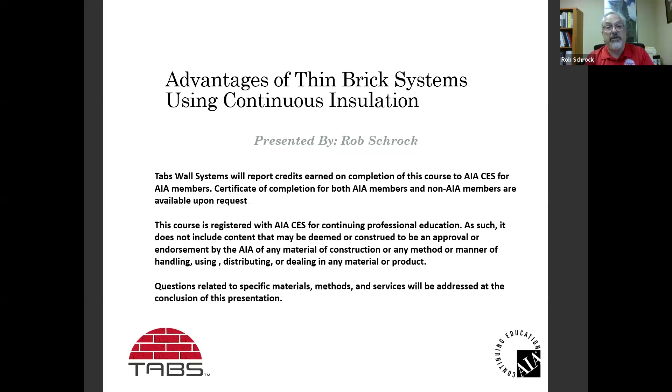Today, we're going to look at the health, safety, and welfare impacts of continuous insulation on applications involving thin veneer masonry materials, an evaluation of concerns for design, installation, testing, and code-related issues.

Learning objectives today are to become familiar with the many possible design applications using thin brick, tile, and stone, understanding the industry trend towards continuous insulation, understanding of the impact of the NFPA 285 flame spread test on adhered veneer applications, and how the Miami-Dade notice of approval can be valuable for your project owner, customer, and occupants regardless of location. We're going to look at the value of specifying properly tested thin brick wall systems, and an evaluation of the concerns in design and detailing for thin veneer application over continuous insulation.

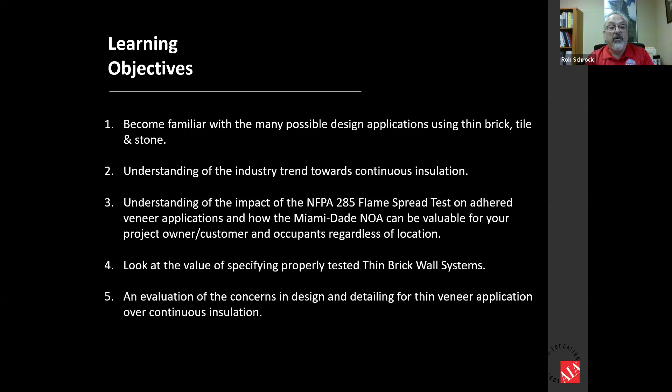So let's get started and look at a few project types that are successfully designed using thin brick. Throughout the years, I've been involved in this system for over 20 years, and hospitality is probably one of the majority users of the system. Every hotel brand has used our system on one of their sub-brands.

Also, multifamily residential has always been a high valued user of our product. And if you look at the last two photos I've just shown, you'll see mid-rise, and as we'll talk about a little later, we can go high-rise types of projects with thin brick.

Again, hospitality has been a large consumer of products like ours. And the medical facilities - we've worked a lot on medical facilities in different areas of the country, whether it be in the Southwest, as in this slide, this is UMC El Paso Hospital.

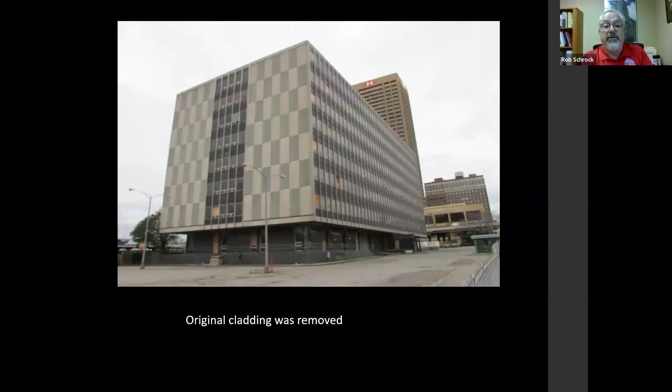So this next series of slides is going to show a project in Buffalo, New York. Thin brick and thin brick systems are an excellent choice for doing renovation work, such as indicated on these slides. This was once a multi-use project in Buffalo, New York. The original cladding that you can see here was all removed.

The original glass and metal cladding were all removed and replaced. The new design idea was to create a masonry facade. The original structure was not engineered to support full bed masonry, so a thin brick wall system was chosen to provide a brick facade that met the original engineered structure.

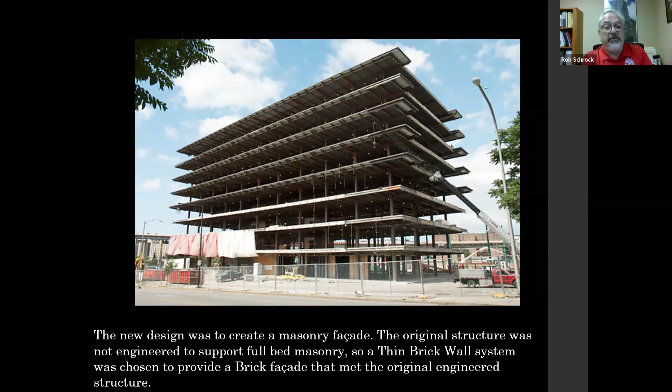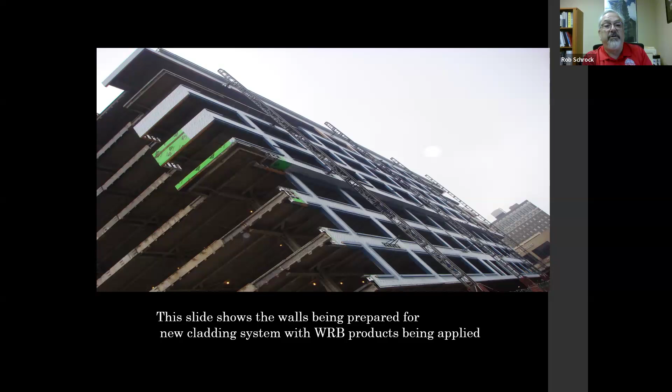Here you can see the walls being prepared for a new cladding system, and the WRB products are now being installed in preparation for the cladding to go over top of them. New sheathing and rigid insulation was added. And now the structure is mixed use office and hotel property.

So now let's look at some key factors to consider for your next project. Here are some thin brick advantages: no foundation brick ledge required - there's a substantial cost savings there. The design load for framing is L over 360 versus L over 600. No hung lintels required. You'll gain more usable floor space on the same building footprint.

And there are year-round installation cost savings available, especially up in the northern part of the country where you have a lot of tenting and things like that - the heating of the mortar and keeping the brick warm for installing masonry projects in the winter. You don't have a lot of those costs when you're utilizing a thin brick system.

You have potential lower labor costs, installed by various trades instead of strictly just masonry trades. So there's some potential cost savings there. For contractors, there's more design freedom - cantilevers, etc. - due to the lighter weight of a thin veneer assembly, and it's easily mixed with other lightweight facade materials like EIFS or siding products. And it's easier to change the facade in future renovations. Retail typically changes every 7 to 9 years in the lifespan of a retail facility.

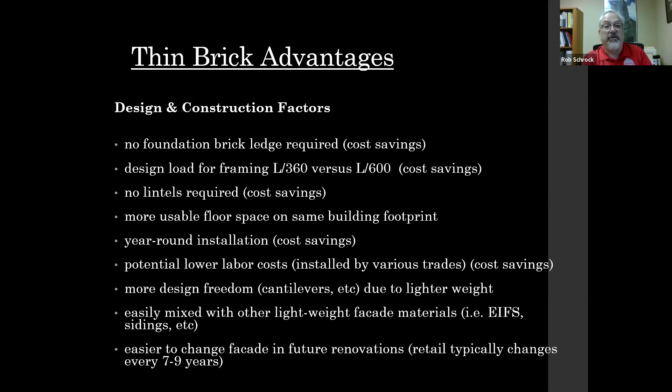So there are several green energy and LEED considerations. A 1:7 ratio of delivered costs for thin brick versus full-size brick, including the units and the mortar. You can ship 9,572 square feet of thin brick compared to 1,637 square feet per truckload of full brick.

165 pounds for thin brick versus 1,350 pounds of mortar per 100 square feet, and 907 million BTUs versus 4,114 million BTUs to produce the thin brick if it's made in a split tile format. And 2,400 to 14,000 embodied energy to produce, mine, manufacture, and deliver thin brick versus full brick. So there's quite a potential for green and LEED opportunities when using thin brick.

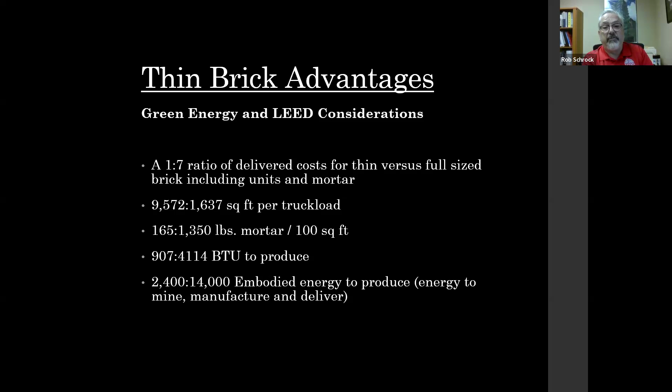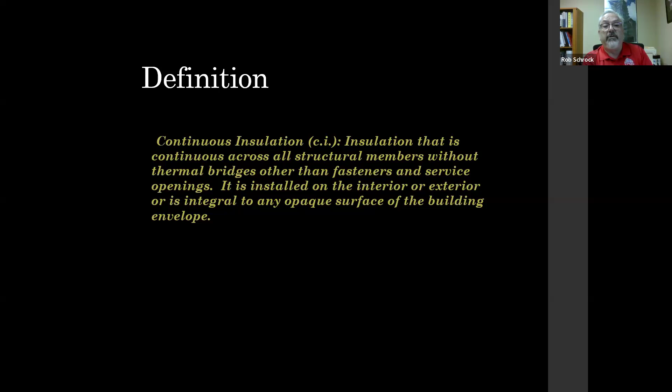So now let's talk about continuous insulation. Continuous insulation is insulation that is continuous across all structural members without thermal bridges other than fasteners and service openings. It is installed on the interior or exterior or is integral to any opaque surface of the building envelope. A continuous layer of thermal insulation mitigates thermal bridges through framing. It's important for steel framing especially.

Cavity insulation is not very effective. A practical, effective way to insulate concrete or masonry walls is considered by building science experts as a best practice, as it is for wood walls, especially in colder climates. And it avoids cold wall surface issues such as condensation, mold, discomfort, and ghosting.

Condensation - everybody thinks that once it's summertime, you don't have any problems with weather, but when the air conditioning is running and you have metal studs, then you get condensation on those metal studs, and that can bleed through. And with continuous insulation, it helps mitigate that.

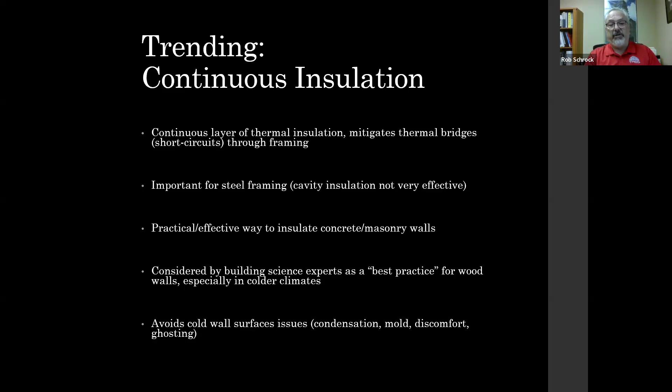So creating a proper building envelope with continuous insulation, you have weather resistive elements, cladding, etc. It's an air control element, a support element, the wall stud framing, the thermal control elements, the vapor control elements, including the interior finish, and NFPA 285 assemblies.

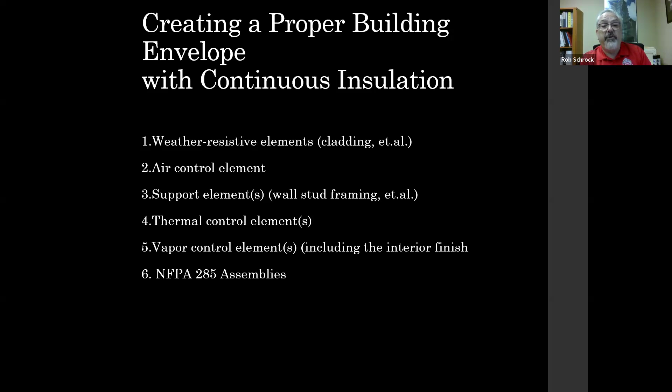In talking about NFPA 285, protecting its occupants and its contents from fire is critical. Partially as a response to increased use of continuous insulation in building envelopes, enforcement of provisions requiring NFPA 285 testing has recently been stepped up.

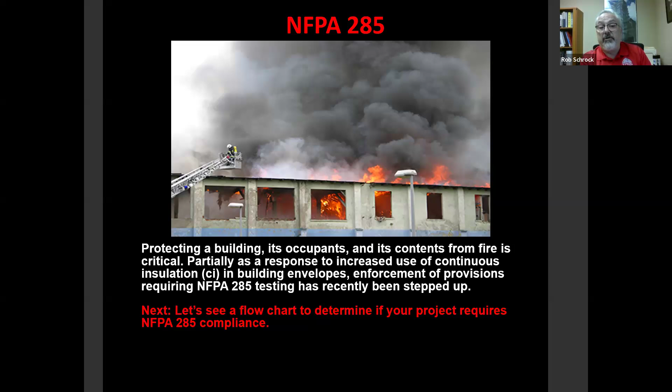So let's see a flow chart to determine if your project requires NFPA 285 compliance. Is the construction type 1, 2, 3, or 4? If no, you follow that arrow all the way across down to the bottom and to the right, and NFPA 285 compliance is not required.

However, if the answer to that is yes, is foam plastic or combustible insulation used? If yes, then NFPA 285 compliance is required. If no, the next question is: is the cladding combustible and installed greater than 40 feet above grade? If yes, then compliance would be required.

If no, then the last question is: is the WRB, the weather resistant barrier, combustible and installed greater than 40 feet above grade? If yes, then NFPA 285 compliance will be required. If no, then it is not required.

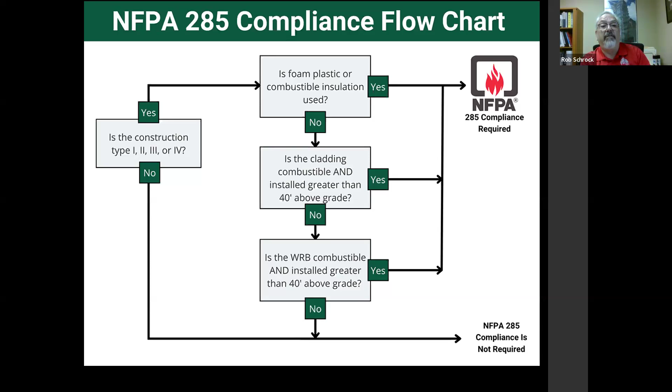The purpose of NFPA 285 is to provide a standardized fire test procedure for evaluating the suitability of exterior wall assemblies that are constructed using combustible materials or that incorporate combustible components for installation on buildings.

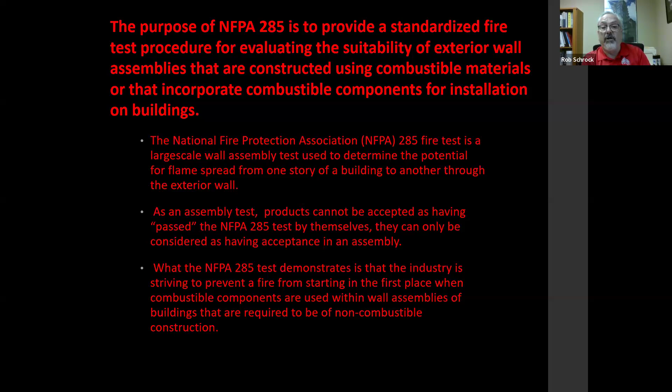The National Fire Protection Association 285 fire test is a large-scale wall assembly test used to determine the potential for flame spread from one story of the building to another through the exterior wall. As an assembly test, products cannot be accepted as having passed the NFPA 285 test by themselves; they can only be considered as having acceptance in an assembly. What the NFPA 285 test demonstrates is that the industry is striving to prevent a fire from starting in the first place when combustible components are used within wall assemblies of buildings that are required to be of non-combustible construction.

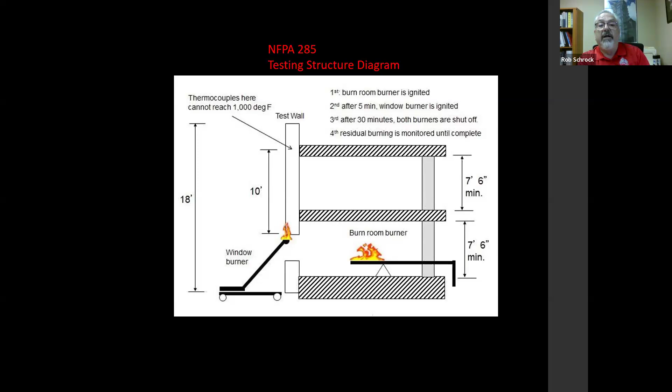So here we have a slide with a testing structure diagram. As you can see, it's a two-story structure. We've got a window burner in the lower left; you can see the window burners right above, showing the flame at the window head, and then inside the structure there's a room burner, a big structure on the interior of the facility. The first room burner is ignited; after 5 minutes, the second burner is ignited, and third, after 30 minutes, both burners are shut off, and residual burning is monitored until complete. And here you can see a picture of what that looks like.

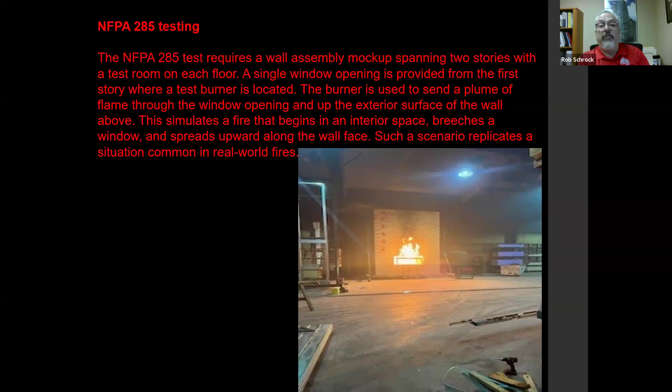The NFPA 285 test requires a wall assembly mock-up spanning two stories with a test room on each floor. A single window opening is provided on the first story where a test burner is located. The burner sends a plume of flame through the window opening and up the exterior surface of the wall above. This simulates a fire that begins in an interior space, breaches a window, and spreads upward along the wall face—a scenario common in real-world fires.

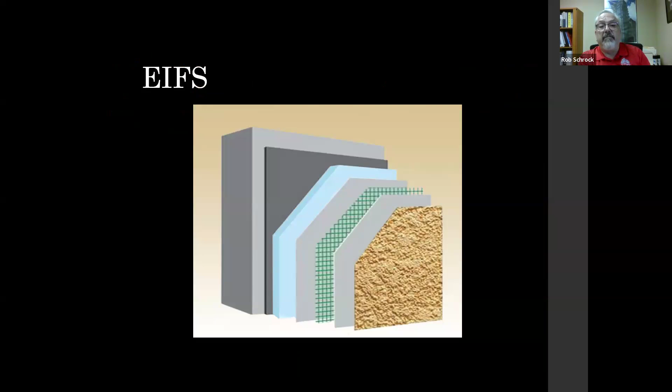Now let's talk about continuous insulation and comparing products in today's market. Today we'll go over product types. You're all familiar, I'm sure, with exterior insulation finish systems for stucco, that's EIFS. We have a few axonometric drawings showing what each of these look like, so you can see all the different components.

There are insulated panels for veneers. This product was used in the States up until a few years ago; now it's mainly used in Canada. It didn't gain a lot of traction, but nonetheless it's a product that's out there, and I thought you should know about it. Then you have factory bricked panels.

These are insulated panels put together indoors, so weather is never a consideration while the assembly is being made. However, there are some limitations—even though it's manufactured indoors, a product like this typically doesn't ship with a grouted complete system because of the racking that occurs during construction and installation of the wall panels.

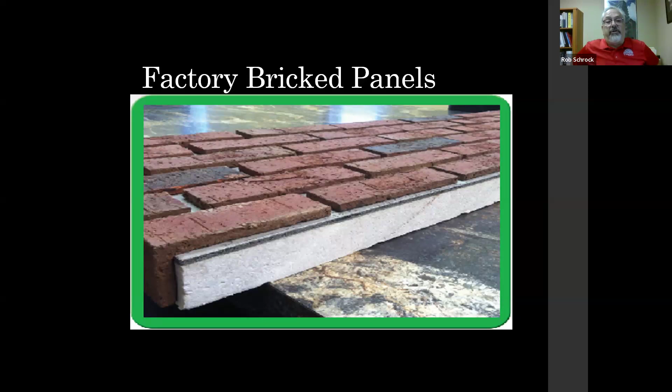There are cement boards with insulation on them that are prefabricated. Those can be assembled in the field, followed by a field-installed application—what I call a lick and stick application—where they put some type of brick or stone over that.

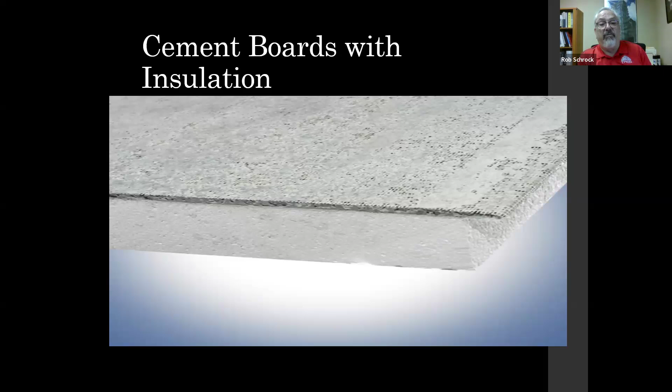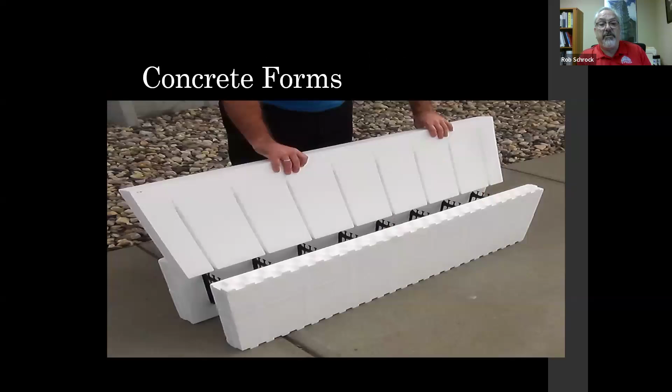And then there are concrete forms such as these. Again, these are insulated, and they fill them with concrete. They have structural members on the interior, and you can fasten through the insulation into those to apply any fasteners needed to hold your veneer on.

And then there's insulated sheathing. This isn't necessarily for other products to go over—this is just a metal sheathing. So you're not going to put any other products on outside of this, but it is an exterior finish, and I thought we should show it.

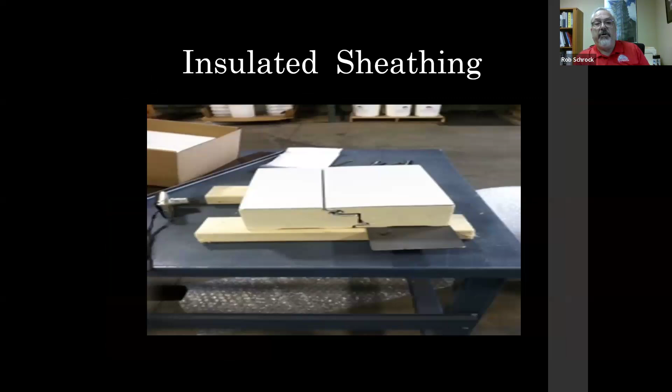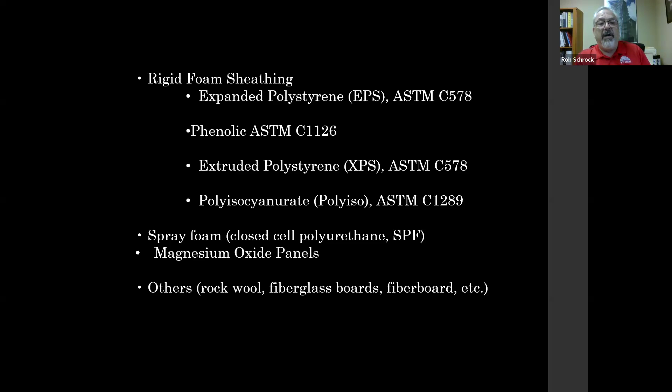So foam insulation boards—there are several different types. We have rigid foam sheathing, which could include expanded polystyrene, phenolic, extruded polystyrene, polyisocyanurate, and spray foam, and then magnesium oxide panels. There are some others too: rock wool, fiberglass boards, fiberboard, etc. There are many I'm sure I'm not aware of, but those are the main ones we see in the field.

So we've made up this quick chart here to talk about the R value per inch. EPS, expanded polystyrene, typically has an R value of 4 per inch. Phenolic boards have an R value of 6.8—that's the highest performing board out there to date. I know there are going to be some new products coming out later this year, and I'm sure I'll have to edit this, but until then, this is my chart.

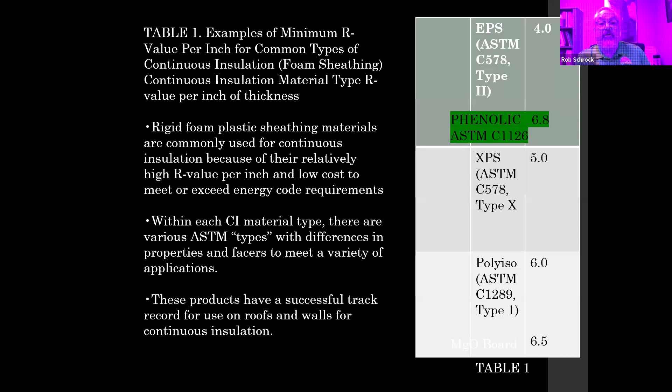XPS has an R value of 5 per inch, and polyiso has 6. The MgO board, magnesium oxide, is 6.5 per inch. So there are some pretty high performing products out there available, lots of choices.

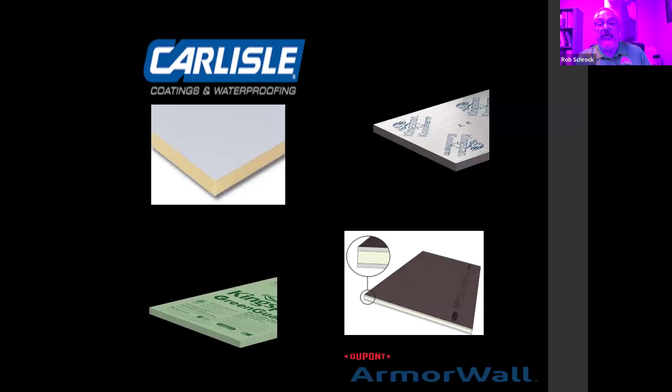These are just a few brands. Carlisle, they make a foam board. Kingspan, they make several different types of what we just talked about. And then DuPont, their latest product is that Armor Wall with the magnesium oxide, which has some great structural properties.

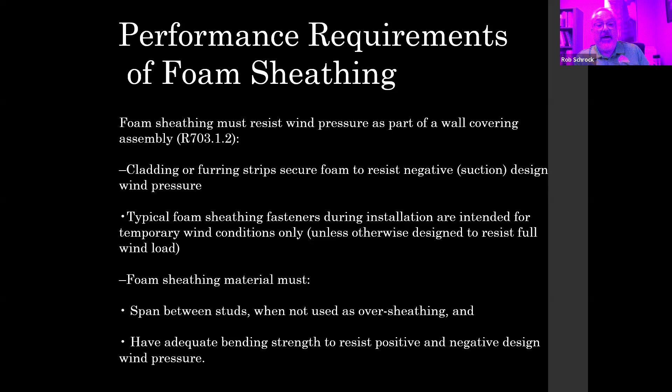And then foam sheathing material must span between studs when not used as an oversheathing, and have adequate bending strength to resist positive and negative design wind pressure.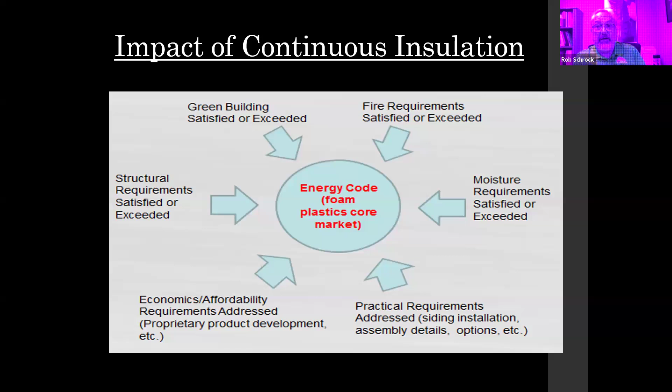And economics, affordability requirements are addressed, because the rigid foams, in the overall insulating properties, using the proper rigid foam, if you pay the money up front, typically you're going to get the rewards down the road long term on the foam insulation. So there's a lot of impacts to consider when looking at a rigid foam and a thin veneer system.

So when choosing your system, have they gone through and done all the testing? Are they meeting all the different compliances? Have they completed an NFPA 285 with the whole assembly, not just their one product? So compliance with NFPA 285 is very important, and compliance with the energy code is equally as important.

And there are changes in fasteners for different veneer installation. You need to consider that, because any good system is going to have the proper fasteners for the complete system, and they'll have done the testing for it. And by using continuous insulation, is that going to help balance your HVAC and the control of vapor drive? When you're using continuous insulation, you're going to be able to reduce the building footprint so that you can expand your interior square footage versus having that brick ledge on the outside of the building just to hold up masonry.

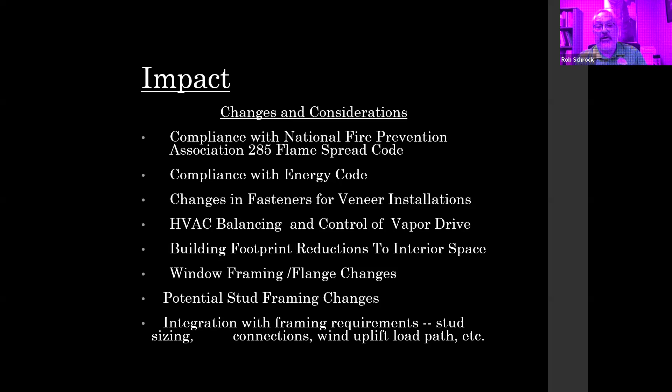And there are some potential stud framing changes when using continuous insulation, and how is it going to integrate with the framing requirements: stud sizing, connections, wind uplift, and load path, etc.

So let's talk about changes in framing. Once you get beyond 2-inch thick rigid insulation, you're going to need to add some framing members. If you look at this picture here, right above that dark blue flashing tape, that's the inside corner of this framing assembly. And once you get beyond 2 inches, you've got to add some backer to fasten the foam and any veneer system that goes on there.

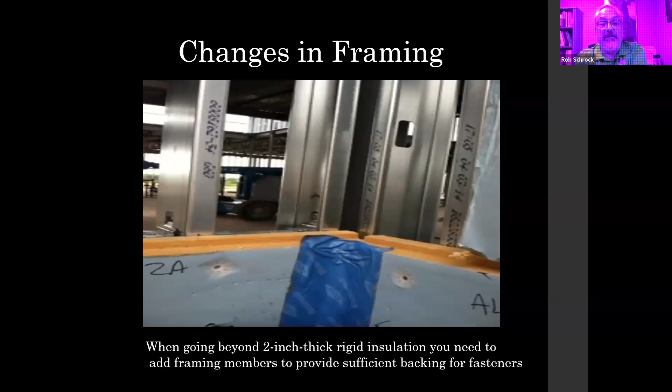Or siding products that go on there, because there's got to be some nailers. Because once you get past that 2 inches, then you literally pushed everything beyond those 2 inside corner studs. So this picture here is showing there's not sufficient framing, so you're going to have to add studs there in order to complete that.

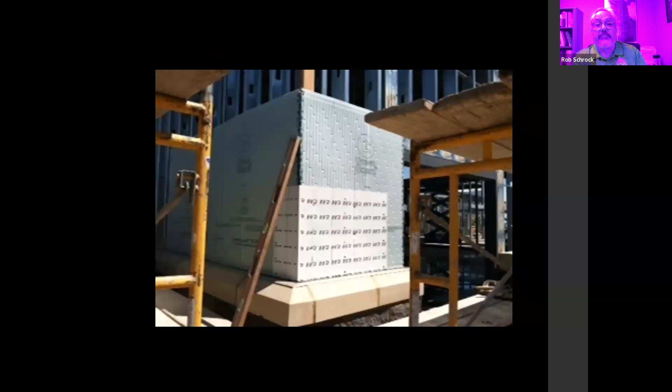There's a lot of different types of foam out there. Here's a product that acts as a rain screen too. You can see all the different pathways for moisture to get behind this metal panel system that you're looking at. It's a good way to keep moisture away from the building.

Fasteners for insulation is a big deal, because the fasteners available in North America, and especially made in North America, are of limited choice. You want to check with your wall system provider as to how thick your insulation can be. Not all wall system manufacturers have engineered fasteners for their systems.

And not only just for their systems, but if you've got a design calculation that says you need 4 to 6 inches of insulation on the outside, that's great. They can make that foam, but chances are there's not a readily available fastener for that. So you need to really look at what type of product you're going to use, and you want to choose one of those rigid foam insulations that have the higher R value per inch, so you can reach your design criteria in what R value you're trying to hit with the thinner wall section.

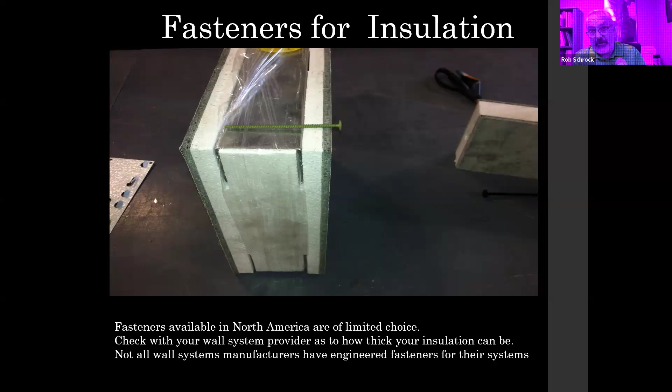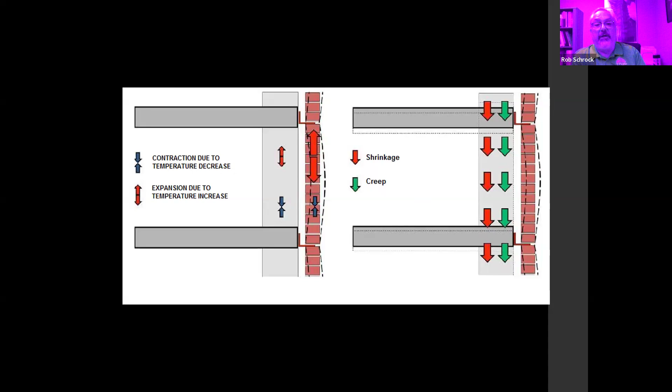So there's a lot of things to consider. Wind, positive pressure on the front wall, suction on the side, suction on the rear, and uplift on the roof. There's a lot of things to consider. And when you're looking at full brick or thin brick, no matter, you've got contraction due to temperature decrease and expansion due to temperature increase. And shrinkage and creep, this all occurs within a rigid foam system. So you want to have the lightest product available that you can use for that masonry wall.

So here's a cutaway of an exterior wall covering assembly. You've got a cladding material and fasteners, a minimum 3/4 inch thick wood furring strip, or a minimum 3/4 inch WSP, the thickness of rigid foam sheathing as required. Optional wall sheathing as required by the building code. Could be gypsum sheathing, could be a CDX, and wall framing per code. Does your structure need wood or steel studs?

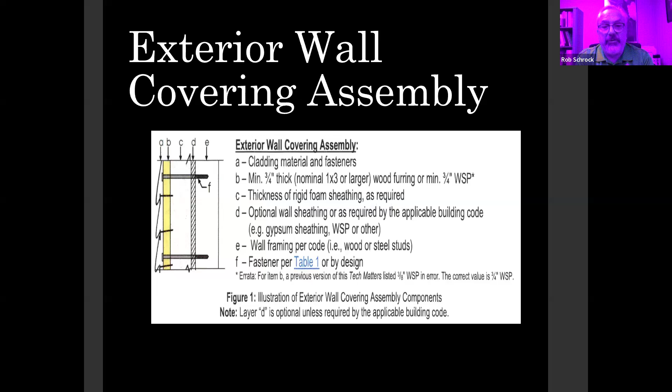And the fasteners are typically done by design of the system. Most good systems are going to give you a fastening schedule. So you want to check with the fastening schedule of the cladding. At the end of the day, the fasteners are typically going to go through the rigid foam to the framing. So at the end of the job, that's where most of your fasteners need to occur. You don't need to have a complete battery of fasteners to hold that insulation on when you're going to be putting tested fasteners from your veneer system manufacturer.

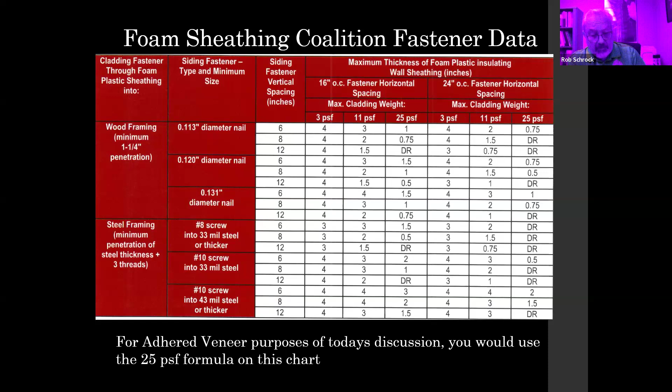So the Foam Sheathing Coalition has this chart on their website, and they've determined what the fastening requirements are for different thicknesses of insulation. And they're showing the minimum and maximum penetration needed for going into steel studs, wood studs. And typically for most projects, on this chart anyways, you're going to follow that 25 PSF schedule. And this chart, again, is available on the Foam Sheathing Coalition's website. And the Foam Sheathing Coalition is currently testing for heavier weights up to 30 pounds per square foot.

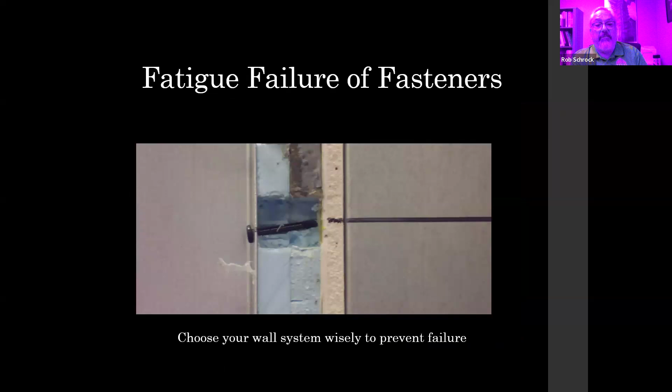So let's look at some of the fatigue failures of fasteners. And typically this occurs when you've got too much weight and you didn't prescribe the proper fasteners, which is why it's very important that the system you choose has done the testing, and you're using your system manufacturer's prescribed fasteners. And the systems that are available today are typically going to avoid a project like this. Now, this product was available 40 years ago, maybe 45 years ago.

And this is why we don't glue thin brick on directly to the foam sheathing, because ultimately the brick is going to work well. The adhesive that's used to glue the brick to the foam is going to work well, and the foam is going to work well, except once you put the glue to the foam, these foams aren't typically, and I can't say all of them because now with Dow's product, their product is quite strong. It's structural, but the rest of these foam boards are not.

And so systems like this, again, this photo was taken back in the early 90s, but with all the freeze thaw, the moisture gets through the mortar and the brick, gets behind there, and the hydraulic pressures push this veneer off the wall. So we've come a long way since then.

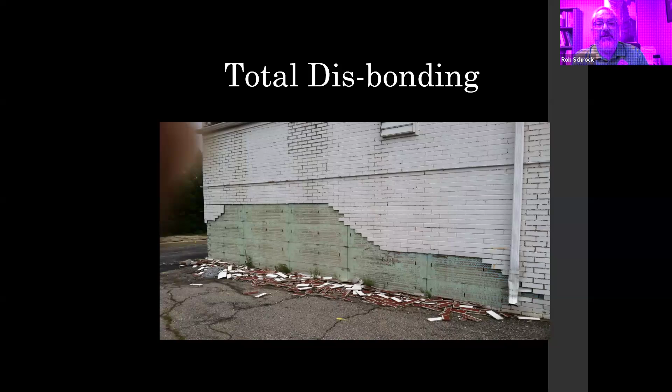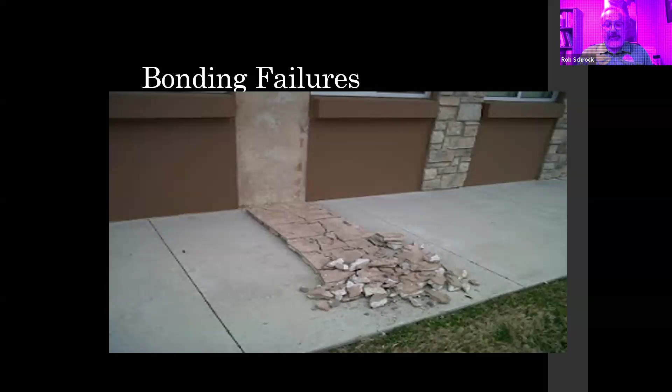Another issue that you have when you're direct applying and not putting control joints in a project, you'll get cracking patterns like this and delamination, bonding failures like this, because there was no method to remove the water that got through the mortar and to the backside of the veneer, and it pushed the product right off the wall.

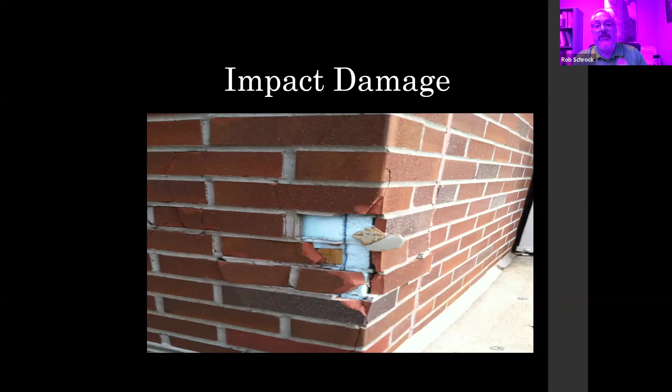A lot of times on some of these projects, there is potential for impact damage, but typically, when you have an area like this, you just take the injured areas off, and then you can repair each area, and you don't have to take large sections off. But again, we're not seeing a complete system behind this. It wasn't using an engineered system.

So, thin veneer details over continuous insulation.

And so now I'm going to show some proprietary details. So here you can see you've got a substrate, an interior, and then you've got an insulation board on the outside of that with a building wrap in between the insulation and the sheathing. And then you have your insulation board. And then behind that, you have a rain screen product.

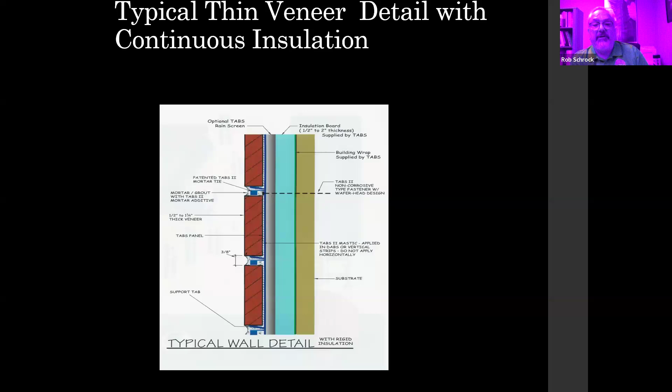And then we have, in this photo, our TABS panel, which is supporting the thin brick. And then the brick on the outside of that, we're using a proprietary adhesive to adhere the brick to the veneer. And with that rain screen in there, it's optional. It's not required, but with that rain screen, it provides a great way to remove any water.

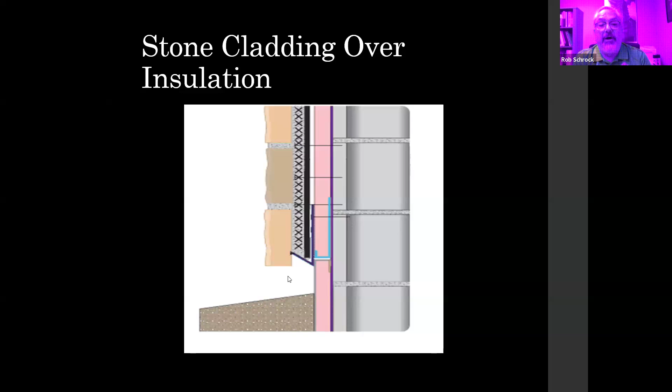And there are some projects out there utilizing scratch and lath systems. And one of the things that you want to make sure you do when you're utilizing that type of installation: you can see in this picture, we're keeping the thin veneer up above the ground. That gray slanted area would be at the top of the landscaping, and they're 1.5 to 2 inches above the final grade there. But then they're also using a weep screed to allow any moisture that gets behind the brick and into the grout to remove itself.

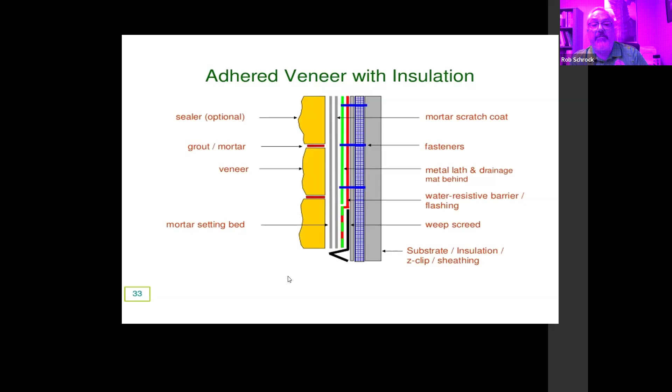And here we see another cutaway, scratch and lath. There's a lot of pieces and parts of this, but when you're using scratch and lath, it does take a little bit more time because you've got some curing time for the scratch coat and the bond coat. And depending on what area you're in, there could be some inspections that take place as well. This is what the bottom of that weep screed is going to look like. You do get a little more design freedom utilizing the scratch and lath because you can put these odd shaped stone, either natural stone or concrete manufactured stone.

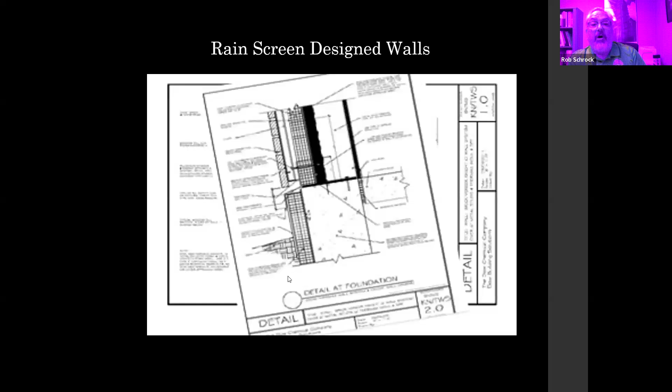So rain screen design walls, those are up and coming systems, but these walls tend to be heavier, using a heavier veneer, and as you can see, there's a lot of heavy gauge steel. But the one advantage they have is that they can put a lot thicker insulation behind them, as you can see here in this slide.

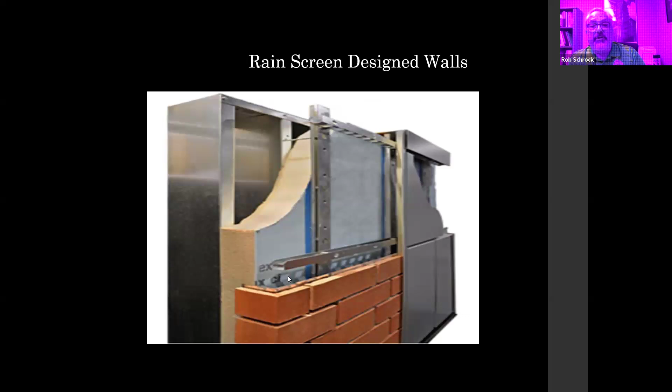So here we have one of our final slides, just about wrapping up. Here we have our NFPA 285 test assembly from when we performed our test. In this assembly, this was over metal studs and one layer of 5/8 gyp board. And then we used our standard flashing around the exterior perimeter. And then we have Henry Air-Bloc 17 MR fluid applied WRB. And then we have our Kingspan Kooltherm K15 50 millimeter insulation.

And then one of our latest products is our TABS FRM 5 millimeter rain screen. That rain screen is Class A rated, and it was also part of our NFPA 285 assembly, as you can see. Then we have our TABS 2 panel. And for the test, we used modular spacing. That's the most common spacing for brick that we have. But anyways, we assembled it according to the specs that were given us.

And it could be that your team wants to use a different brand or type of insulation. We used the Kingspan Kooltherm K15, which is a phenolic insulation, but I have engineering judgments available for all different rigid foams that are on the market today. If you need that for your project, feel free to contact me or my team, and we'll provide you with a copy of those.

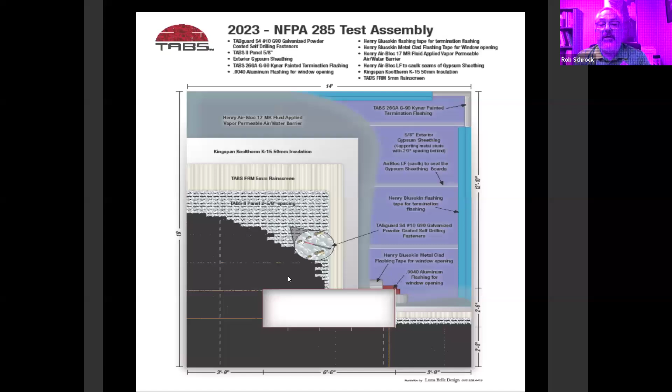And finally, one of our most recent tests, one of the things I'm very proud of, is that we are the first thin brick assembly to pass the Miami-Dade TAS 201, 202, and 203. We've received our notice of approval. We did pass that. If you want more details on that, we do have that available.

And one of the surprises at the end of that notice of approval from the Florida engineers, the engineers report states we have no height restriction in using the Tabs 2 panels for adhering thin veneer to your structures. That is a first in the industry.

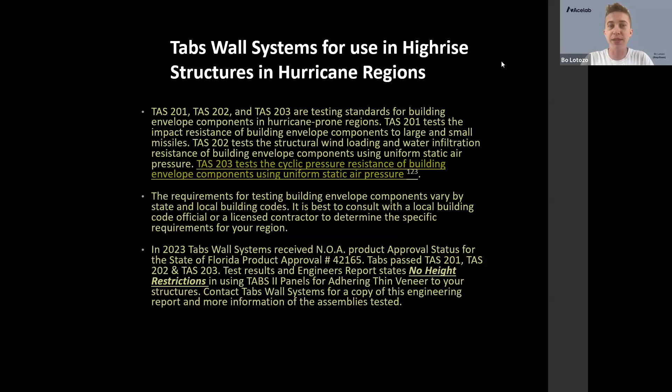Okay, first off, we have from Brandon: I'm curious about the durability, lifespan, and maintenance of thin brick compared to normal brick. Have there been any studies done on this? So my background is basically seat of my pants from the street. We have projects out there with our system that have been out there since the early 80s. All the products in our system, for example, our steel that we use on our panel, is a lifetime product.

When you consider a standard metal roofing, a G60 metal roof, if you look at the history and the standards they put forth, G60 on a roof panel exposed to weather, back when that product first started coming out, those were a 70-year lifespan. Our steel is G90 structural grade 33, and it's also covered by a veneer. It's never exposed directly to the weather or sunlight.